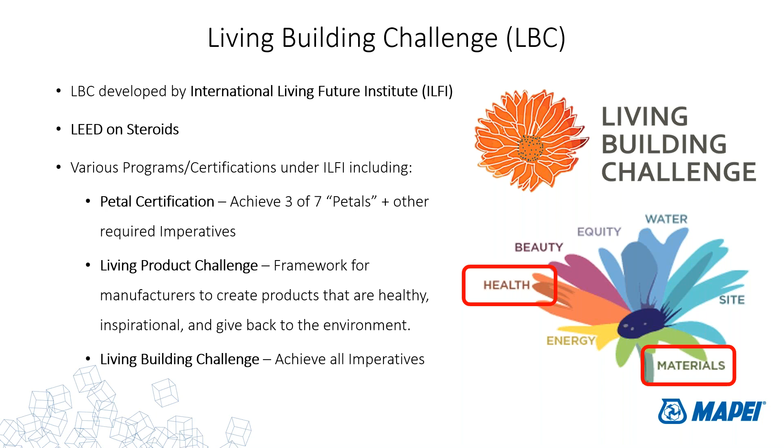This diagram just shows all the International Living Future Institute certifications, Living Building Challenge being the full certification and the one that's most difficult to achieve, but we're seeing more and more that it is achievable.

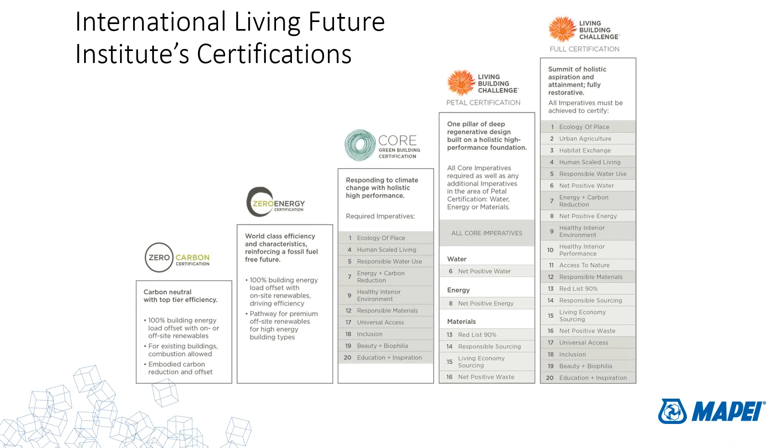The Well Building Standard is the first of its kind. This is a rating system that's focused solely on the occupants of a space. It was developed by Delos and administered by IWBI, certified by GBCI, which is the same certifier as LEED.

I like to explain this as where LEED leaves off, WELL picks up. For example, I'll use plumbing fixtures: LEED would look at a kitchen sink or lavatory faucet's gallons per minute, and WELL would look at those same fixtures and ask how the water quality will impact human consumption. There are parameters with water quality they'd have to meet, but they're not looking at the same thing. They're comparing apples and oranges.

However, there are a lot of similarities or synergies between LEED and other green building standards. WELL can be used not in place of LEED or Living Building, but rather at the same time. You can achieve both certifications at the same time, and it can be pursued on its own as well. You don't have to pursue LEED or Living Building to also pursue WELL.

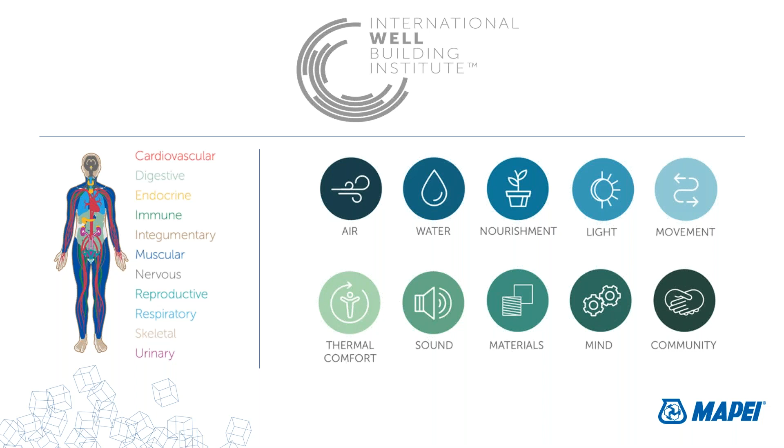WELL breaks down as follows: there are credit categories or concepts, and these categories are made up of preconditions, which are mandatory, and optimizations, which are points. MAPEI products contribute to 3 WELL concepts: air, materials, and mind.

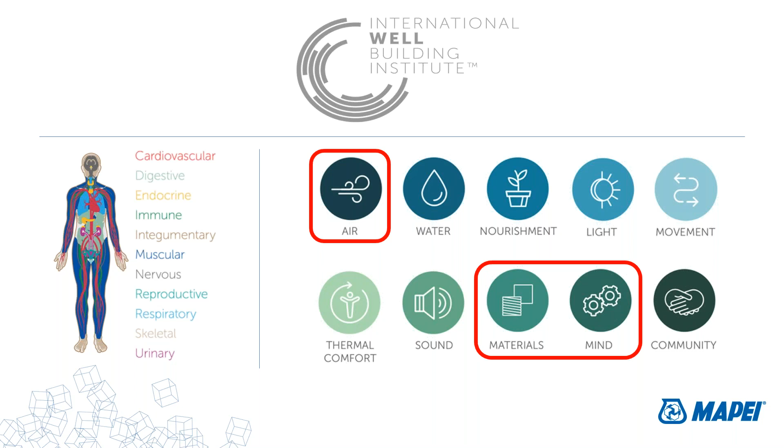Similar to LEED and the others, the more optimizations achieved, the higher the certification level. There are also currently 2 active versions of WELL. There's no sunset date yet for WELL version 1. WELL version 2 now includes the materials concept, which further adds to version 1's VOC and transparency requirements.

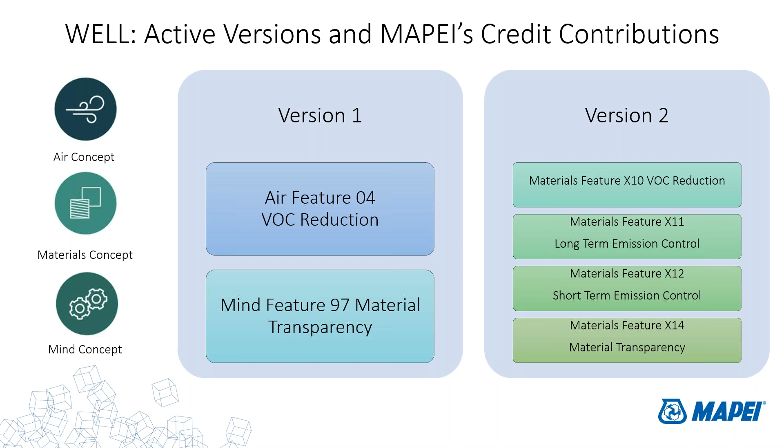I did mention this one when we were talking about all the green building standards at one time. ParkSmart is a supplementary certification program to LEED. LEED doesn't certify parking garages; instead, they have ParkSmart, a certification program just for parking garages. And we have ways of contributing to ParkSmart as well.

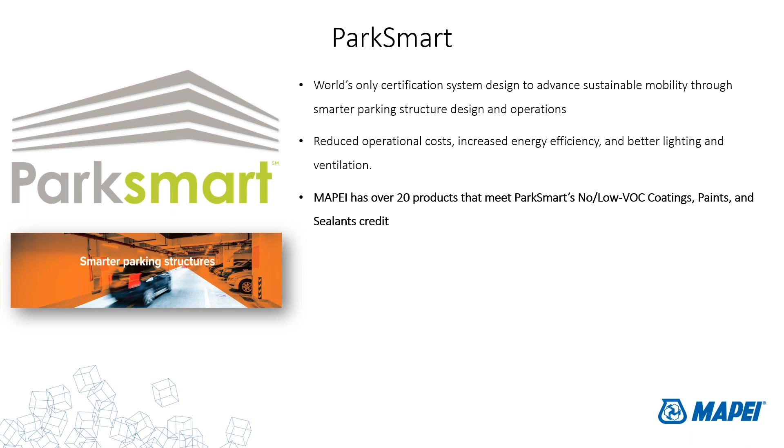So it's not uncommon to see projects that pursue multiple rating systems at one time, which means you're juggling multiple rating systems. The core and shell of the building on the left pursued LEED version 3, and the tenant spaces on the right pursued LEED version 4 and WELL. So you're constantly juggling different rating systems as well as different requirements and material expectations for each. What works for one system might not necessarily work for another.

So it's important to have these conversations with the project team ahead of time to find out the goals of the project.

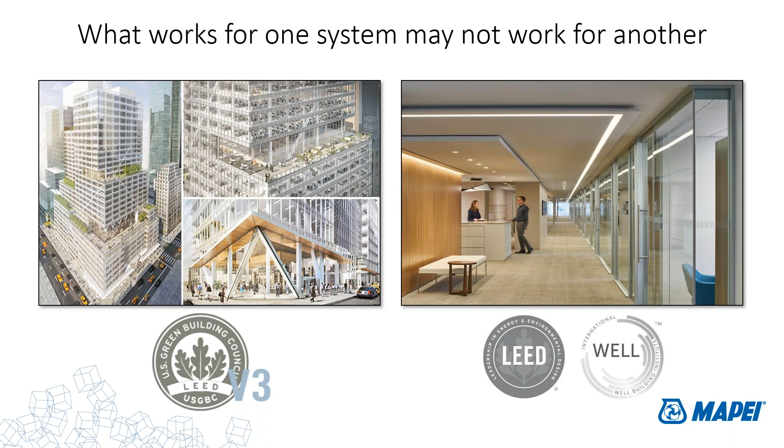Also important to note, and I'll use LEED as an example here, building projects receive LEED certification based on the number of points achieved. There's no such thing as a LEED product. Green products can contribute to LEED certification, but selecting green products doesn't automatically mean the project team will achieve LEED certification. MAPEI products can contribute to about 10 points under LEED version 4 or 4.1, which means the project team needs another 30 points just to get LEED certified.

And I would say even more than 30 points, because we're not always guaranteed the 10 points just mentioned from MAPEI. You need to have the wiggle room in there to get these certifications. Again, products cannot be LEED certified.

There is also no such thing as a LEED certified person. They're accredited professionals, or APs. There's also green associates and fellows based on a consultant's experience and the exams they've taken. Similar rules apply for Living Building Challenge and Well Building Standard - they all have different ways of associating certification. It's just important to note if a manufacturer tells you they have a LEED certified product, run.

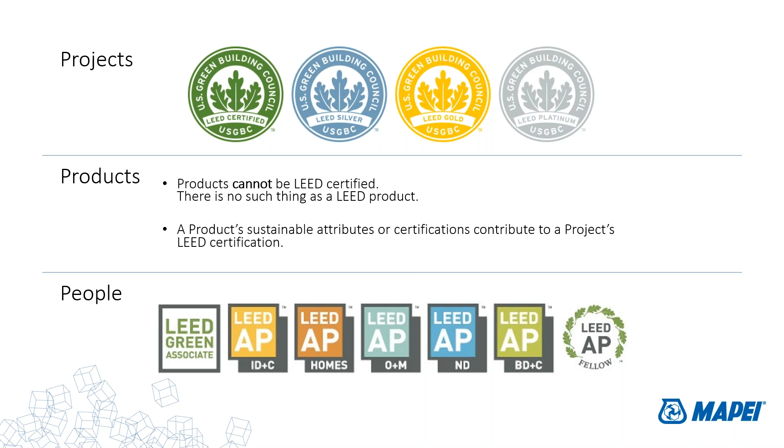So at MAPEI, we've identified similarities among all of the rating systems, some that we discussed and some that we haven't. And we're selecting certifications that allow MAPEI to meet the needs of multiple green building certifications and standards.

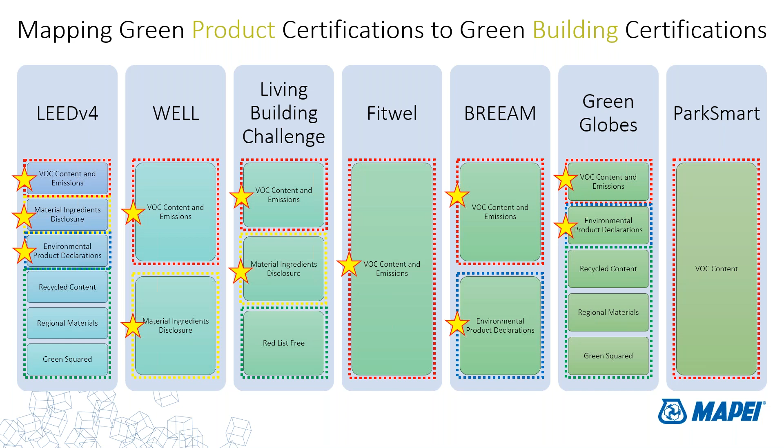So you can see there's similarities across the board in different areas of environmental product declarations, VOC emissions, what they're asking for as far as transparency, disclosing material ingredients, and other attributes. In addition to these similarities, anything with a star requires third-party certification, and we'll get into those.

Again, this next section will take a deeper dive into green product certifications that contribute to green building certifications. Just a reminder, everything we just discussed was related to building certifications, and now we'll break down into the green product certifications that contribute to those building certifications.

These are just a few of the green product certifications or attributes a single product can have. There are an estimated 600 product certifications around the world, with just 100 in the US. In this presentation, we'll discuss those that are specific to MAPEI.

There are certifications that cover human health, others that cover environmental impacts, and some that cover both. And that's what we'll break it down based on their impacts.

When talking to sustainability-minded customers, they will use the word transparency a lot. It means they want to know what's in the manufacturer's products and how it will impact the environment and or building occupants. Transparency started with the formation of the Living Building Challenge, the Well Building Standard, and previous green building certification systems implementing health-related credits.

So for example, LEED is now pushing a lot towards adding credits, or adding innovation credits that have more of a health impact. It used to be that LEED was focused on energy efficiency in the environment, and you can see that with each version that comes out, they're evolving.

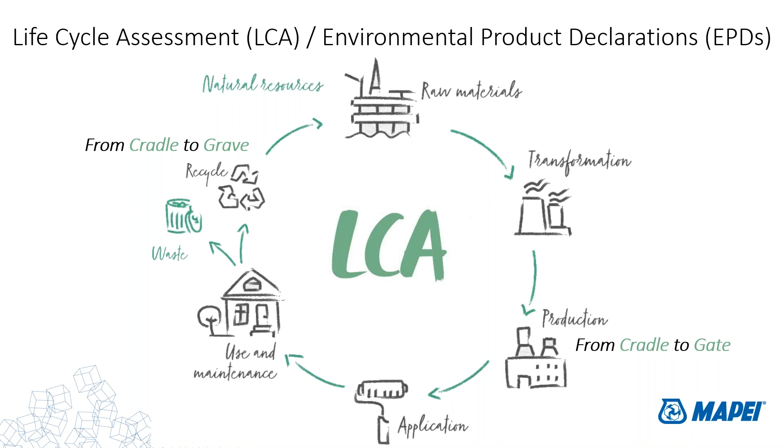Using specific calculation software, the LCA is taken into account, and the data that's produced identifies these environmental impacts through quantifying the impacts of that product on the environment.

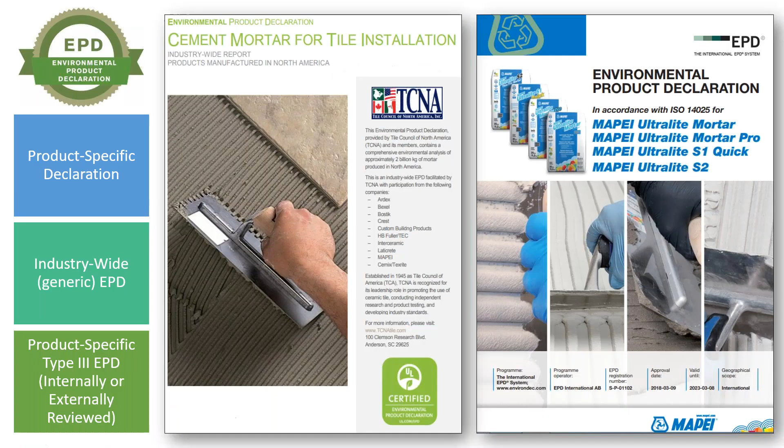So there's global warming potential, which is how much heat greenhouse gas traps in the atmosphere, eutrophication, photochemical ozone creation, abiotic depletion potential, all of this way over my head, but we do have a team here that can analyze environmental impacts, and then that information is put into a report called an environmental product declaration, or an EPD.

EPDs quantify a product or a material's impact on the environment from extraction of raw materials through the disposal of the product or material after use. Having an EPD does not imply that the declared product is environmentally superior to its alternatives. It's voluntary, it's a report. You have one, whether, not that our information in here is false, but you can have one good or bad. It's just a declaration of what was identified in the environmental impacts through that LCA.

There are a few types of EPDs. There's product-specific EPD, which would be the first one that you see on the left there. This is products with publicly available LCA, or life cycle assessment, that conforms to ISO 14044, and they have to have at least a cradle to gate scope. This is a product-specific EPD for a manufacturer.

It's what I would call a self-declared environmental product declaration, where you start to see value in contribution to green building certifications would be the next two.

There's an industry-wide or a generic EPD, and that's for products that have gone above the self-declaration environmental product declaration. And that's the report that you see in the middle there, the environmental product declaration through TCNA for cement mortar for tile installation. And again, this is a general environmental product declaration. So you can see that the manufacturer is not recognized as the sole participant in the program. You can see that many manufacturers have contributed to TCNA's environmental product declaration.

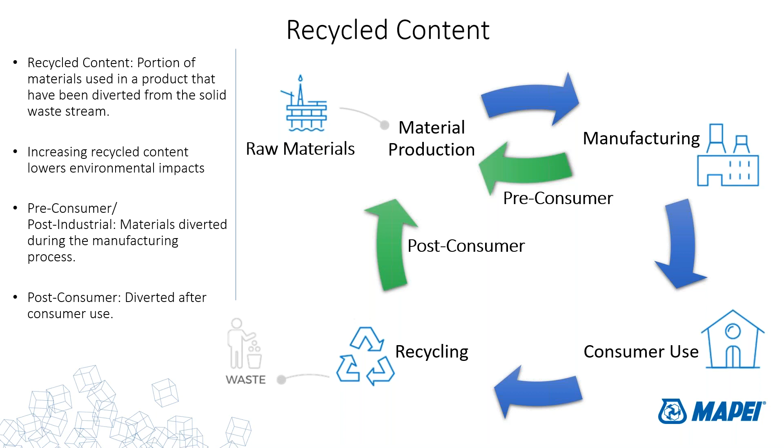Some products have third-party certification for recycled content, and this certification just demonstrates that the manufacturer, or MAPEI in this case, made a commitment to conserving natural resources.

Regional materials. Again, this is probably one you're more familiar with because this has been around since the beginning of LEED. And many products travel significant distances before arriving at the project site, and there's impacts associated with transportation that can be significant, like increased gas emissions. So selecting locally sourced products helps reduce the need for resources and helps the local economy if you can.

MAPEI and other manufacturers can provide manufacturing locations to contribute to this, and it does not require third-party certification. You just reach out to the manufacturer and ask for the location of extraction and manufacturing locations, and they should be able to provide that for you.

This is a difficult attribute to achieve, especially for MAPEI as a global company, and we're getting raw materials extracted from all over the world. And in some of these green building rating systems, you're anywhere from 100 miles to 700-mile radius, depending on which certification you're pursuing. It can be difficult to achieve when materials are extracted halfway around the world, but there are other sustainable attributes that have a greater impact.

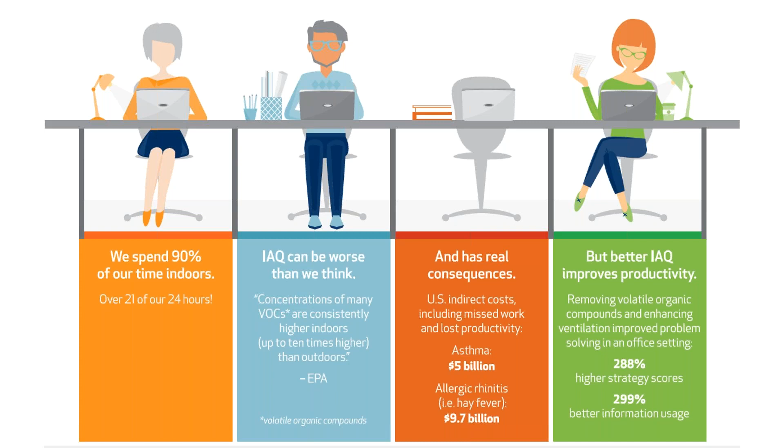Why does indoor air make us sick? Well, common contaminants are the main cause of poor indoor air quality, and exposure to these, specifically VOCs, can result in a range of health issues from asthma attacks to headaches to elevated blood pressure.

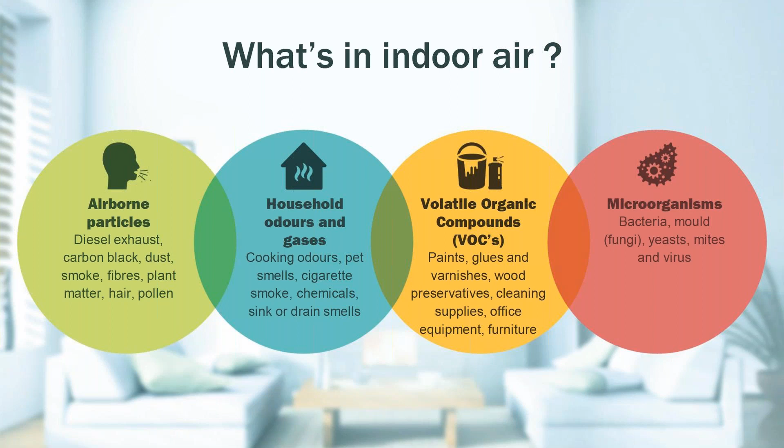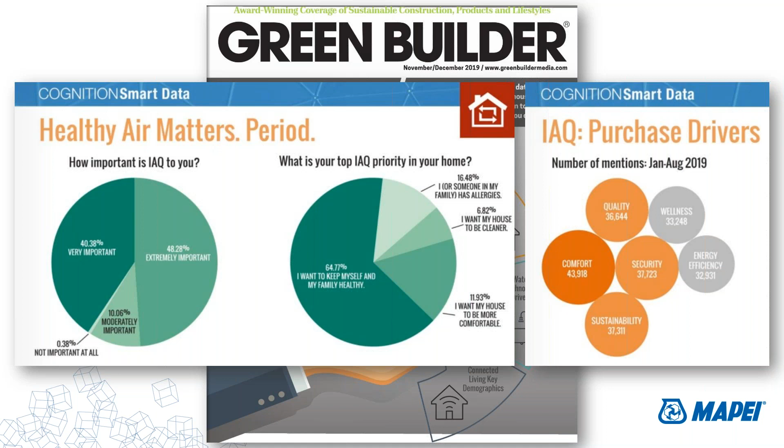Volatile organic compounds, or VOCs, are organic chemical compounds whose composition makes it possible for them to evaporate under normal indoor atmosphere conditions of temperature and pressure.

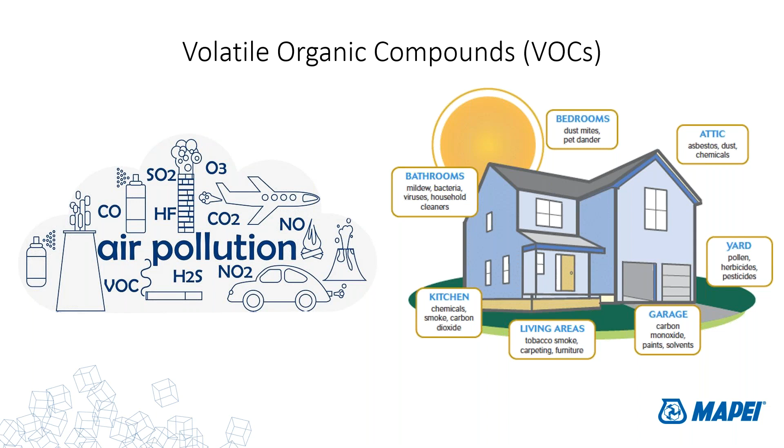In order to be considered low in VOC and compliant with many green building rating systems, products have to meet two requirements. The first is to limit VOC content. Content is as simple as it sounds - it's the content of VOCs in a product, or how much of the product is VOCs. Content of VOCs in a product can vary. It's important to evaluate, select, and install building materials that minimize exposure to VOCs.

There are also regulations in place for limiting VOCs in products. The South Coast Air Quality Management District, or SCAQMD, has the most stringent VOC regulations in the US. VOC content is expressed in grams per liter. South Coast SCAQMD rules dictate the VOC content for paints and coatings, including floor coatings, and also for adhesives and sealants, as shown here.

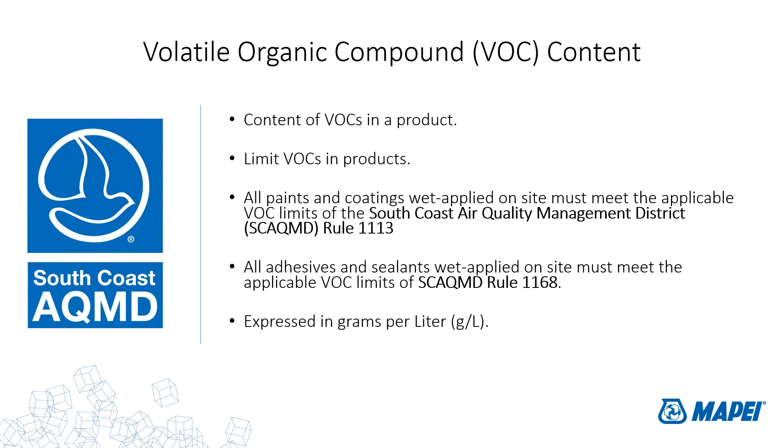Tile itself is a product with zero VOCs because it meets the requirements of being inherently non-emitting. At MAPEI, we develop products with low VOCs to reduce impacts to indoor air quality, as well as protect the health of installers and end users.

The second requirement for VOCs is to have VOC emissions verified and certified. VOC emissions is simply the VOC content that evaporates into the air. They're high indoors, and these emissions are what installers and end users breathe in.

This VOC emissions certification that we'll share next is voluntary. Manufacturers choose to have products tested - they're not required to do it yet. VOC emissions are tested to standards such as CDPH, and that provides the foundation for manufacturers' claims that a product is low emitting.

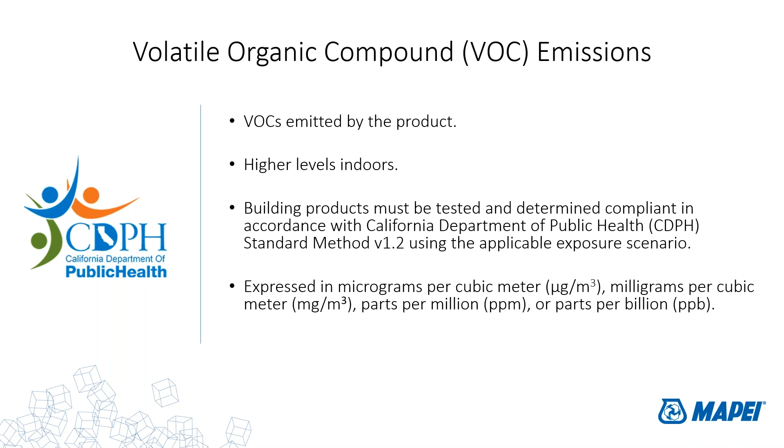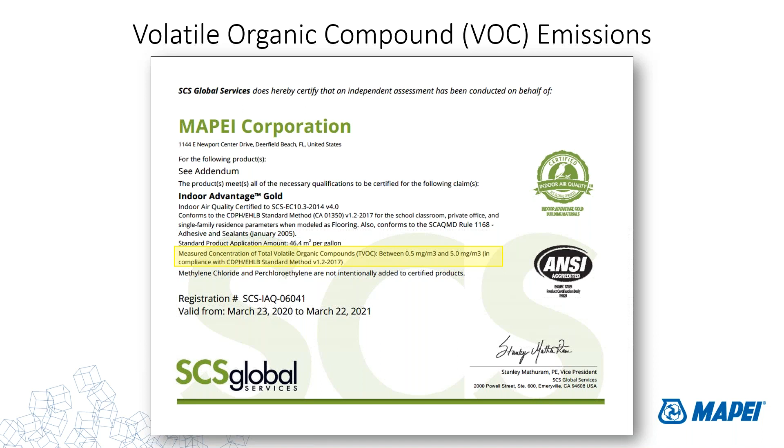For purposes of LEED and other green building rating systems, manufacturers only have to provide this TVOC range or certification - there's no need to provide a report showing testing was conducted. They just have to show this certification. There's currently not a maximum level of TVOCs you have to comply with; you would just provide the range shown on the certification.

The next attribute we'll talk about is material ingredient reporting. Material ingredient disclosures focus on negative effects that building materials have on human health and wellness. Currently, there are no regulations that require manufacturers or their suppliers to disclose product information beyond their safety data sheets, or SDS. However, manufacturers can offer to disclose their product ingredients should they choose to. It's voluntary. There are several reports or declarations that provide chemical ingredient disclosure information, including manufacturers' inventories or an MI, health product declarations (HPDs), cradle to cradle, declare labels, UL product lens, and more.

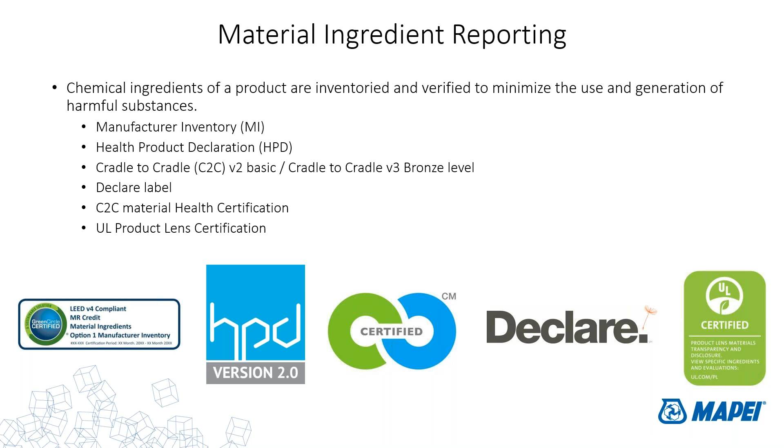Here's an example of a manufacturer inventory. The chemical ingredients that are in a product are all listed. I know it might be hard to see, but we provide these MIs, or manufacturer inventory reports, disclosing our chemical ingredients to at least 1,000 parts per million. We recently started completing these reports in-house, and we're working with our suppliers as well as our third-party verifiers to make sure that we are being sustainable from supplier all the way through MAPEI's production. And we have these reports that are, again, third-party verified to make sure that we're disclosing chemical ingredients.

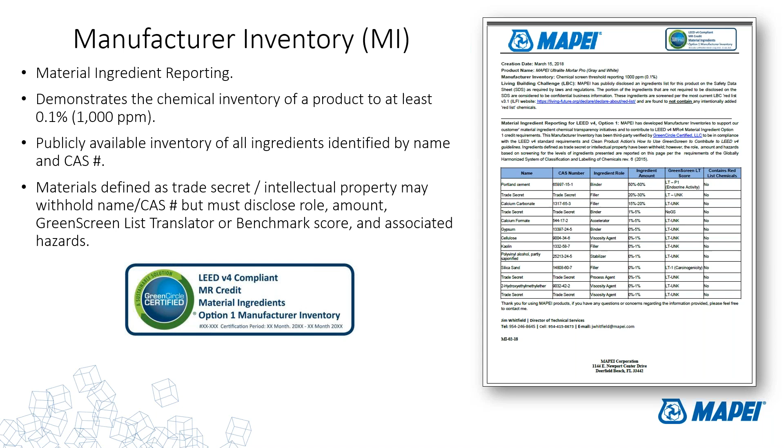The International Living Future Institute, ILFI, has developed this Red List of chemicals that should not be included in construction, especially if you're working on a Living Building Challenge project. According to ILFI, this list is composed of materials that should be phased out of production due to health concerns. This list gets updated as new science emerges, as well as when the Living Building Challenge or similar Petal certifications come up with a new version. They typically update these.

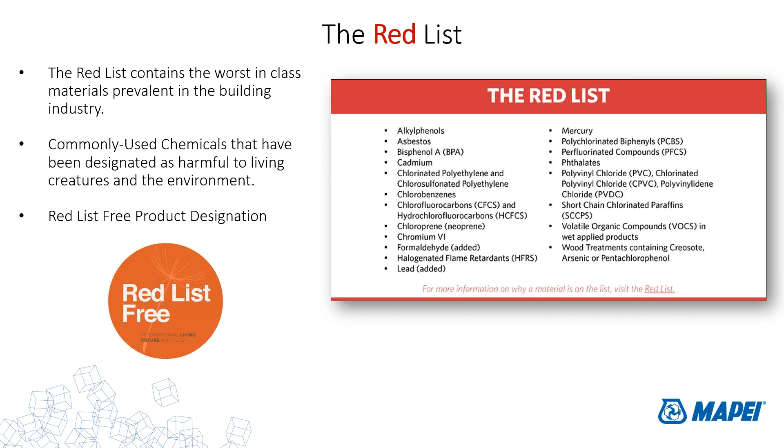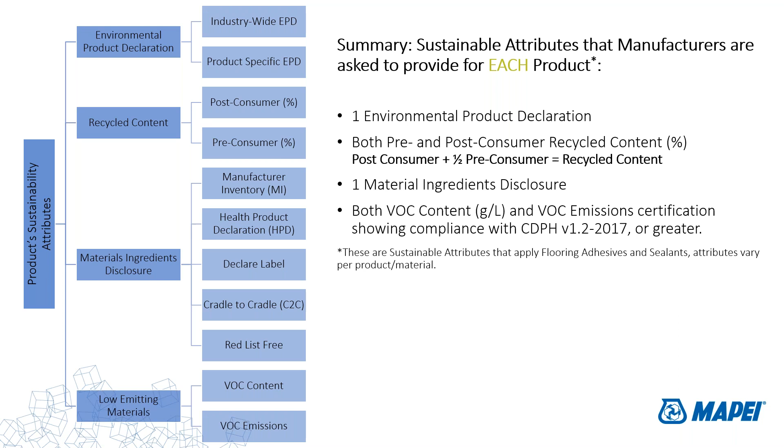So in summary, that was all of the sustainable attributes or certifications that are being asked of us as manufacturers. If you could have an environmental product declaration, that breaks down into different types: having recycled content, having materials that are low emitting, providing a material ingredients disclosure. And these are, again, subdivided into the ways that you can go about getting those different attributes. It's a lot to ask of a single product. This is a summary of everything I just discussed.

So MAPEI offers environmental product declarations. We have over 30 industry-wide EPDs, 11 that are product specific. We do have products that have recycled content, both post and pre-consumer. We provide over 50 products with material ingredients disclosure or a manufacturer inventory, and that list is expected to grow. We do have products that are red list free, and we have products with low VOC content and over 250 products with the VOC emissions certification, as well as innovation or bonus for certain green building rating systems, the Green Squared certification.

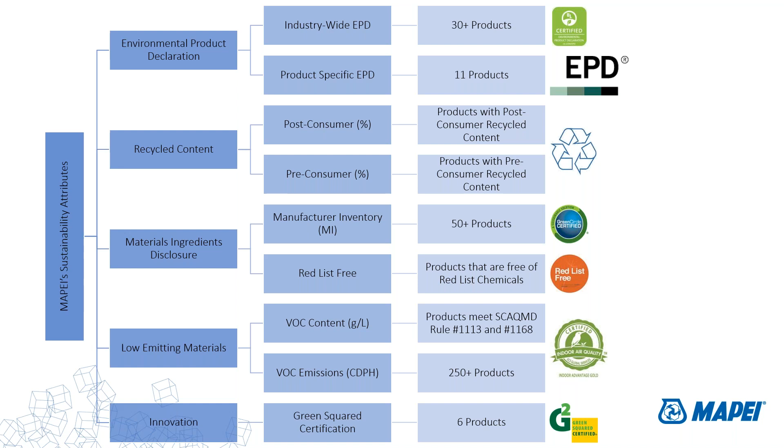So how do you select products for your project? I would start with selecting products by looking in your specifications. It requires a lot of research and evaluation, but the best place to start would be with the Sustainable Design Requirements spec section, or 01-8113 typically. There's a wealth of sustainable information available pertaining to what your project needs, both in the Sustainable Design Requirements as well as the Division 9 specifications. The key is to start with identifying what green building certification system is being pursued, after which the project team should educate themselves on what sustainable attributes are needed to meet that certification system's goals, and then how to find those products to meet those requirements.

Ask the project team questions. Some of the questions you could start with would be: will this project be pursuing green building certification? What credits is the project pursuing? Are there any specifications if you weren't given any? Again, review the spec sections and your specific spec section further to identify what attributes or what certifications the project team's looking for. Will every product meet these specifications? Probably not. It's best to work with project teams and the manufacturer to find the best product or products for your project, or they can help you find alternatives.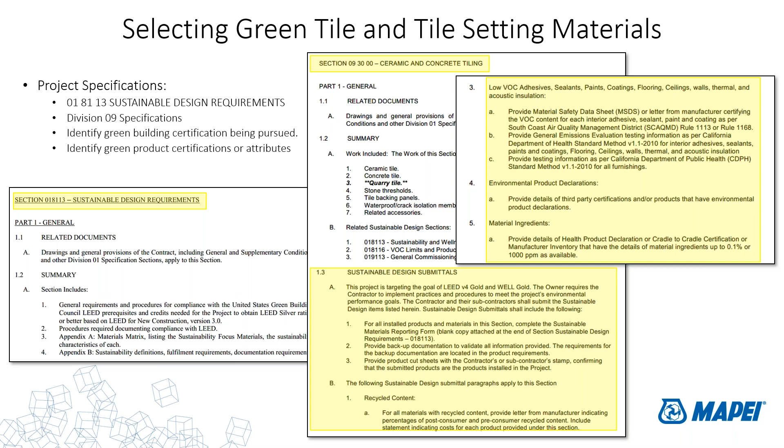There are also free online product databases such as Mindful Materials, EcoMedes, and USGBC. USGBC just started one called Better Materials, which they announced at the last Greenbuild conference last year. These are databases for project teams to select products that meet their project's sustainability goals.

I would recommend reaching out to your manufacturer first. The process of selecting, specifying, and collecting documentation for products pursuing green building standards or certification systems can be time and budget consuming - I've been there. However, manufacturers, including MAPEI, understand that these third-party certifications for sustainability are becoming increasingly important as sustainable construction becomes the norm rather than the exception. As new and more stringent requirements continue to be introduced in the sustainability context of construction, project teams can expect to see progress from manufacturers, including MAPEI, in how we're growing sustainability on the different certifications and attributes we provide for each of our products.